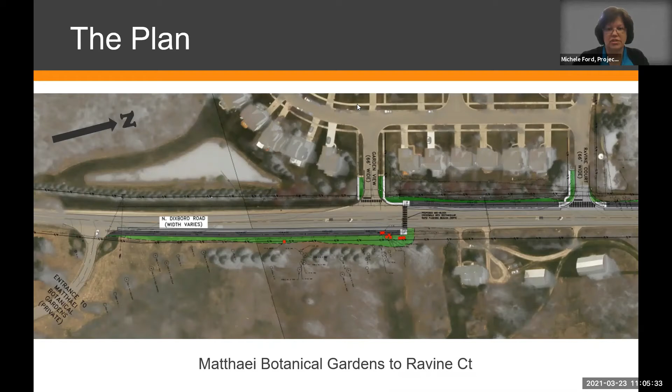There'll be a mid-block crossing there, and I have some pictures of examples of what that will look like coming up. Then it'll travel on the west side of the road going northward. You can see at Garden View and at Ravine Court that we're going to connect the existing sidewalks to the trail to make it easier for people coming out of the subdivision to get to the trail safely. Next slide.

Between Ravine Court and Amanda Drive, it goes along the west side of the road. It's going to be on the back of curb. I'll have some pictures so you can see what that's going to look like. There's also a culvert along there that we need to extend out a little bit, and I'll show you what I mean by that.

The green areas on this drawing show kind of the limits of disturbance. You can see that we're within the right-of-way through all of this. In some of the areas, especially as you get closer to Amanda Drive, it's pretty close to the current grade, so there's not going to be huge amounts of disturbance outside of the trail footprint.

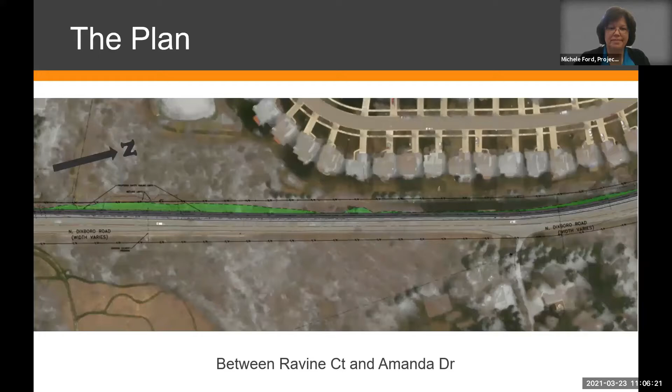Then we go across Amanda Drive. Once again, we're connecting those existing sidewalks into the trail. Then the trail will diverge a little bit from the curb to get it across Plymouth Road. That allows us to have room for some signal items. We have to have a controller cabinet for the signal.

It'll go across Plymouth Road. There'll be a signalized crosswalk with a countdown, kind of a traditional crosswalk box that you've seen. Then it's going to travel inside the Marshall Nature Area to go up to their existing parking lot up there. There's a little driveway. It's going to connect into that parking lot. So you can go to the next slide.

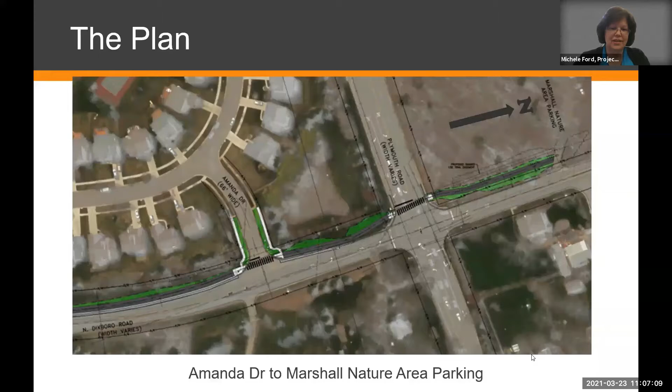In general, the typical cross section is going to be, we're going to construct a larger road shoulder. Right now, there's only a foot or two of paved shoulder out there. So we'll be adding a 4-foot shoulder, then some curb and gutter. And then the pathway will actually be about 10 feet wide of asphalt.

The 2-foot clear zone between the pavement and the curb will have some corrugations in it. I have a picture of those for you so you can see, and that will be a visual and a physical deterrent for people if they're getting a little bit too close to the curb. And then there'll be a clear zone between the end of the pathway and the rest of the grassy area. So go ahead, Emily.

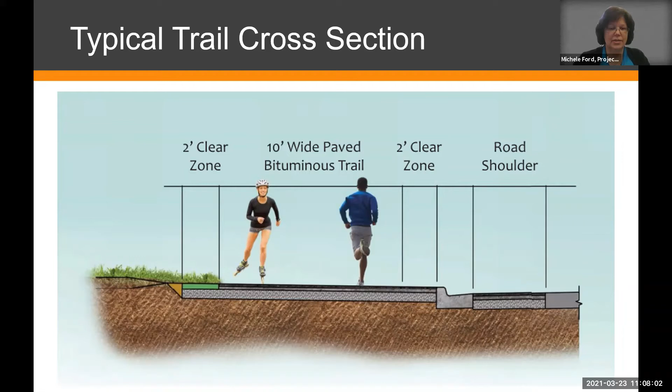I know some people like to see construction drawings. So this just kind of shows you that when we build the trail, we don't just throw asphalt down on the ground. We actually build a foundation for it. What this doesn't show is there's actually also going to be some storm sewer beneath it to help us with drainage so we don't have any water issues out there.

We put an aggregate base down. We typically like limestone so that it gives us a good foundation, and then there'll be a couple of layers of asphalt on top of that as well. So you can see here how we build it up to get a good foundation, and it'll be a good stable trail for us. Next slide.

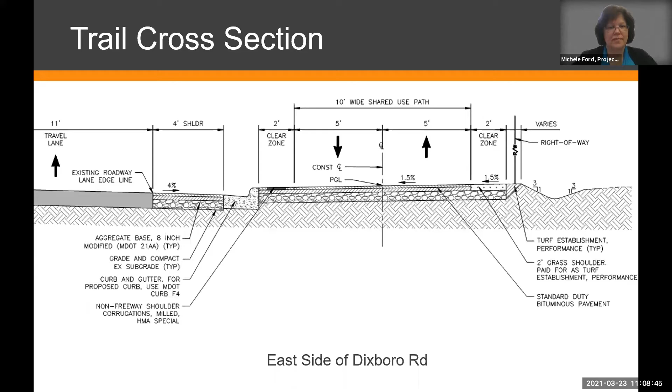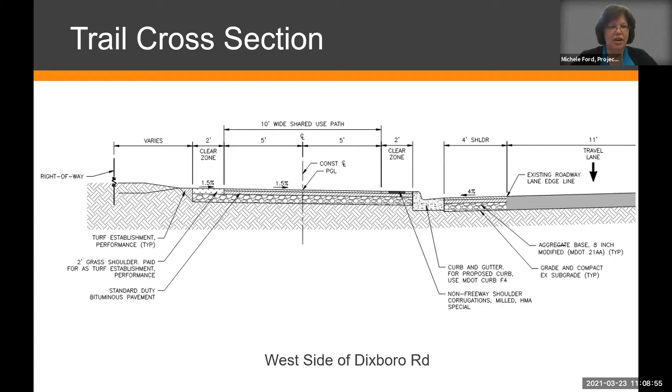This is the same thing on the west side of Dixboro Road. It's just basically a mirror image of the one that you just saw. Go to the next slide.

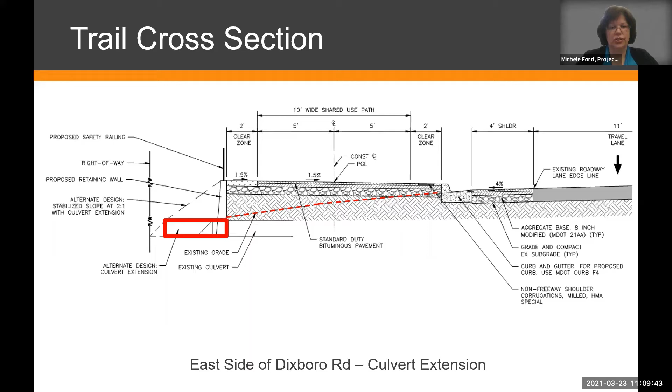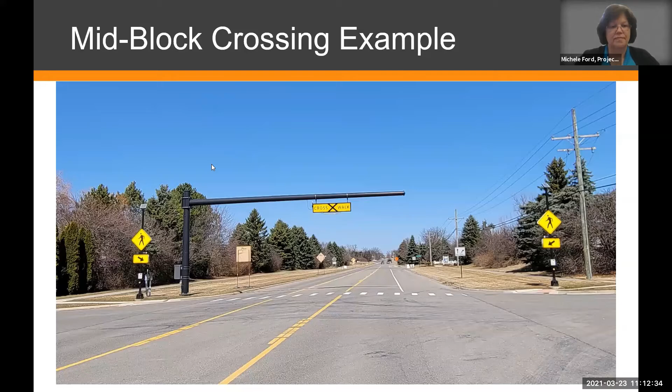In addition to the pathway project, we partnered this project with one of our Washtenaw County Road Commission projects, at the intersection of Dixboro Road and Plymouth Road. We're upgrading the existing signals, putting in all new mast arms, and also adding a right turn lane on southbound Dixboro Road to Plymouth Road. We received a grant, a CMAQ grant - Congestion Mitigation and Air Quality Grant. There's been a lot of traffic backing up there, so there can be an air quality concern. We get grants through special funding to help with projects like that. So we're putting in that right turn lane on southbound, which will be adjacent to our trail.

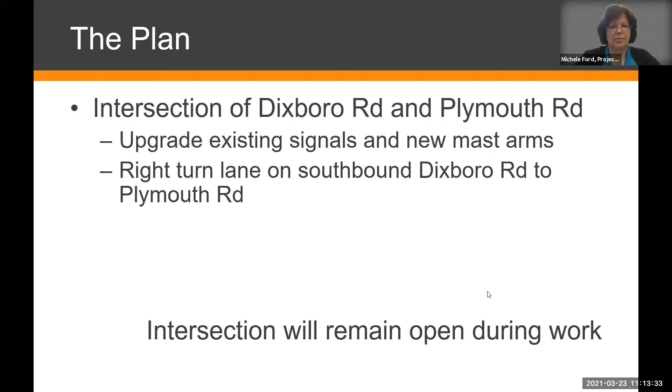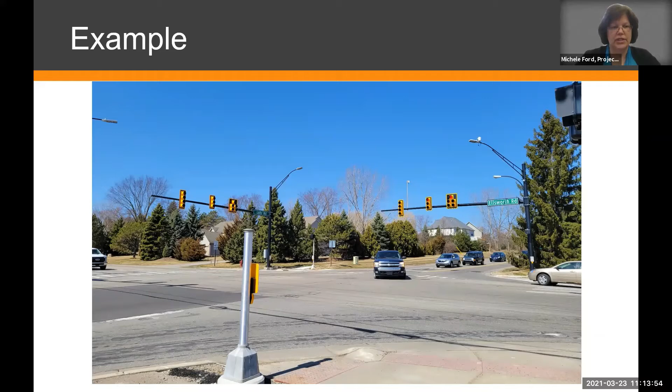This is a construction information meeting, so I wanted to give you some of the things you can plan on seeing during construction. We have a saying here at the Road Commission that it's going to get ugly before it gets pretty. There's a lot of work to be done, and the contractor will decide the order he does this, but in general this is the order we tend to see: clearing, then underground work, earthwork, the base course gravel, curb and gutter, asphalt paving, restoration, and signal work. We've got examples of each of those for you.

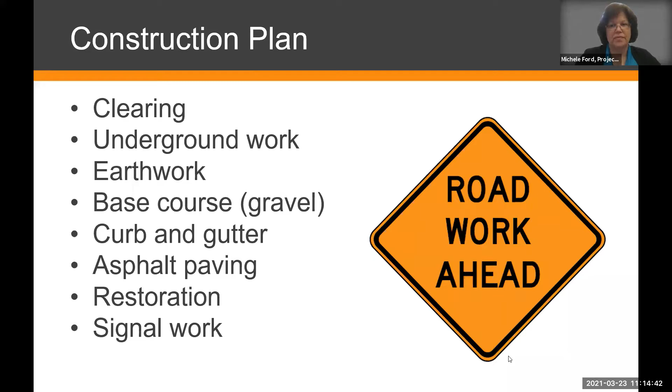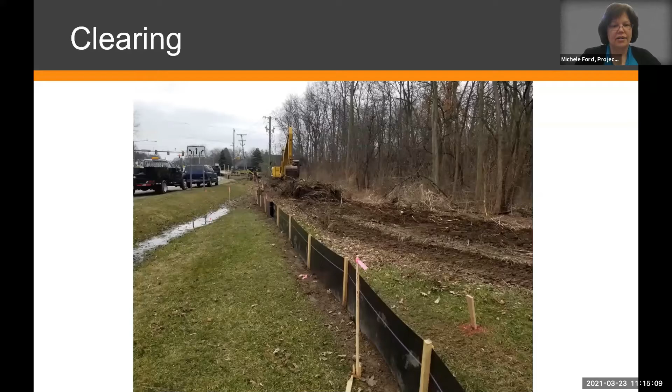The first thing you're going to see is some clearing work. This work is scheduled to begin on Monday, March 29th. They'll come in and there is some tree removal on this project, although not huge amounts. There'll also be some brush removal and clearing of some topsoil and items along the ground.

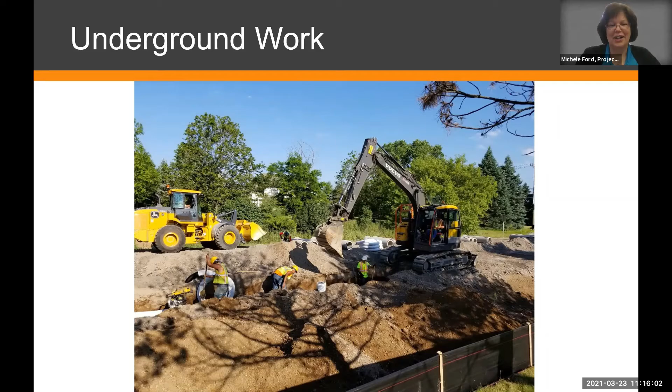The underground work is where we'll put in some of that storm sewer. I want to caution you that we dig big holes for this, so there's going to be a large, deep hole in the ground. Rest assured, we will fill it in and it won't be there when we're done, but it can be a little concerning as you're driving by - it could be a 5 to 10 foot deep hole where we're putting in storm sewer, allowing for water to collect and capacity for that, because we don't want any drainage issues once we're all said and done. It involves large equipment, lots of earthwork, and there will be a hole.

Once we get that storm sewer in, we're going to fill in the hole, and then we have to start putting in the amount of dirt that we're going to need to construct the trail. We have to get it to the level that we need it.

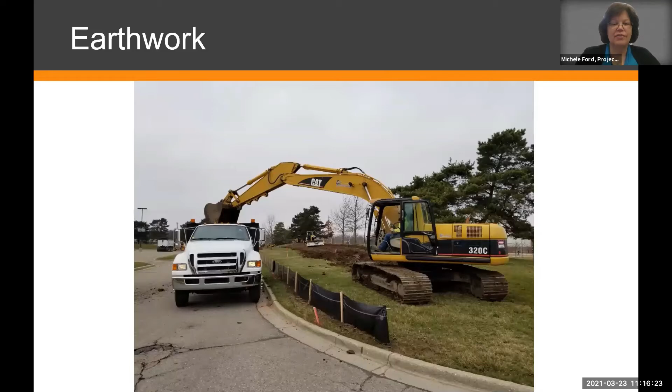The next slide will show that this is what we call grading. This gets it to the approximate level that we need it to be. In some areas, you're going to dig a little deeper. In some areas, you're going to fill.

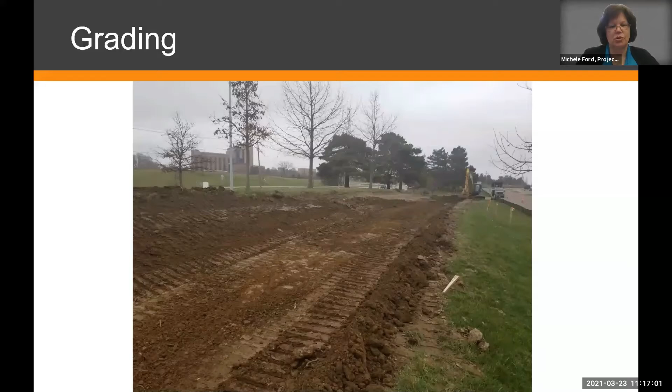This project in general stays pretty close to the existing grade because we're right there near the side of the road, but there still is going to be a little adjustment here or there to make sure that the water is flowing in the direction that we want it to. We don't want it impacting any private properties or anything like that. We need to collect it and handle it, and we'll make sure that it's going in the right direction.

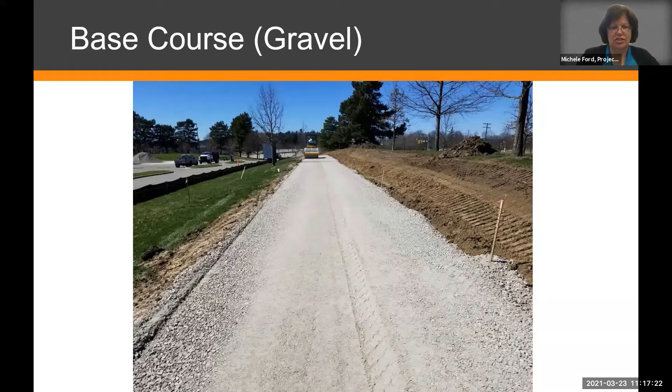So next, we put down that base course, which for us is going to be limestone. It's crushed up, they place it there and they roll it to compact it. They test it to make sure it's at a certain compaction so that we don't have any settlement issues afterwards.

Then we're going to probably put curb and gutter on. In different areas these things may vary a little bit in the order, but usually we put the curb and gutter on after we've got that aggregate down.

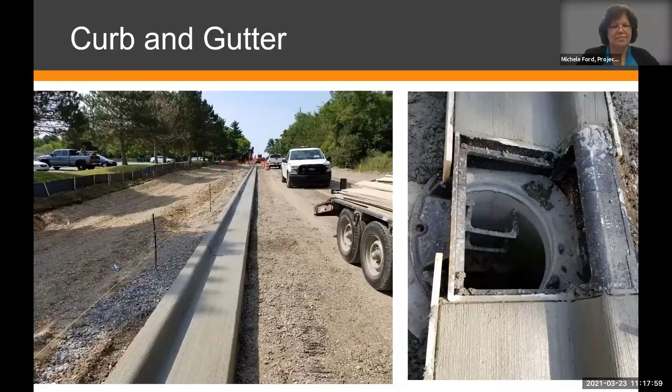And then the pavers will come in. There's a couple different layers of asphalt paving. We put down, I believe it's going to be 2 inches of one mix, and then we add another 2 inches on top of that. That gets all rolled out, compacted, tested, to make sure that it's all stable and constructed the way we need it to be.

The contractor is required to restore all areas that have been disturbed by the construction. So rest assured that when we dig those big holes and when we're doing that earth disturbance, that we will restore the area when it's completed.

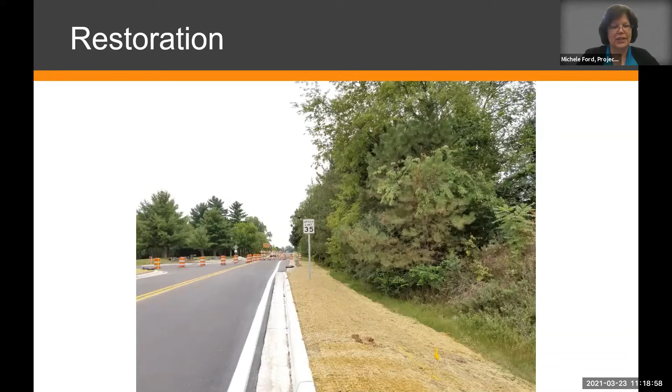So in order for this to work, of course, Plymouth Road, Dixboro Road is a pretty busy intersection. We can't take one set of mast arms down and wait a couple of months before we put the next set of mast arms up. So you may see out there both mast arms at the same time.

We have to put the new ones up, get everything complete, and then when we're ready to switch it over, we will pull that old one down. But there will be an overlap time slightly so that the traffic intersection is never without a signal. We don't know the exact timing of when this is going to happen, but we will keep you informed as we go along.

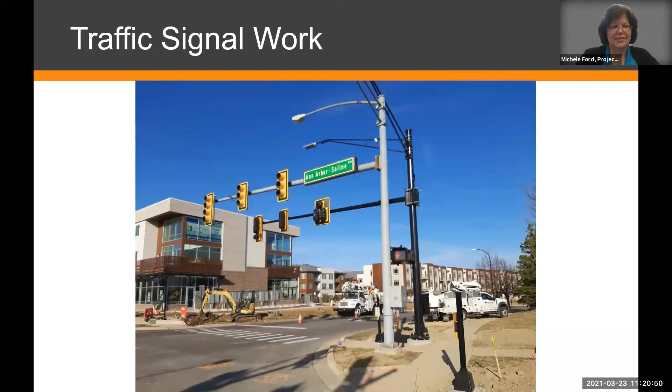This is concerning to the Department of Environment, Great Lakes and Energy. So they asked us, as part of this project, and we needed it for our permit, to come in and do some work around this culvert. We're going to put riprap around it, some stone, and grout it in to stabilize the area underneath so it doesn't deteriorate anymore. This shows that sometimes in order to get permits for one part of a project, we have to do something else to qualify. We're not touching this culvert on this side of the road, but because we're touching the other side, EGLE decided we had to do work on this one in order to receive the permit for the other side.

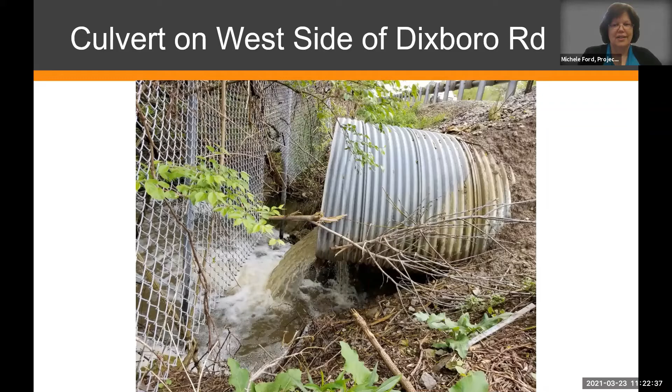As far as the schedule goes, our clearing and tree removals are supposed to begin Monday, March 29th, per our current schedule with the contractor. The culvert work - the riprap underneath the one I just showed, and the extension - is also part of our EGLE permit, and there's a time of year restriction on that, so we have to wait until after June 30th. We'll be working on other parts of the trail, but for that small section in the water, we have to wait until after June 30th. The rest of the work, our schedule shows we'll be complete by later this fall. The contractor will decide the exact schedule of the rest of the work.

Those new traffic signals, the mast arms - the big tall black arm the signal itself goes on - have to be ordered and take a long time to arrive, 4 to 5 months before we can get those delivered and put up. So that will probably be one of the later parts of the project. They'll likely build the trail portion before getting to the signals, probably in late summer. But once again, we'll be starting this coming Monday, finishing by late fall, and the rest is up to the contractor. Next slide.

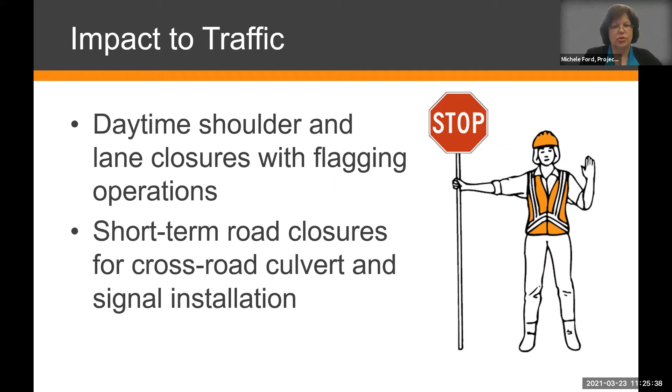In general, mail delivery should not be impacted, and neither should trash pickup. In the subdivisions, we will not be blocking access. It's possible that as we're doing construction on one entrance, you may have to use the other entrance for a day or so, but in general you will have full access to your homes.

A family had come and they just decided that they thought the trail was cool and they wanted to look and see the big equipment at work. It's not safe for pedestrians and bicyclists. So we ask that you obey any traffic control that we have out there, including pedestrian barricades or any other barricade device, and stay outside of the work zone. Any disturbed areas will be restored before the end of the project.

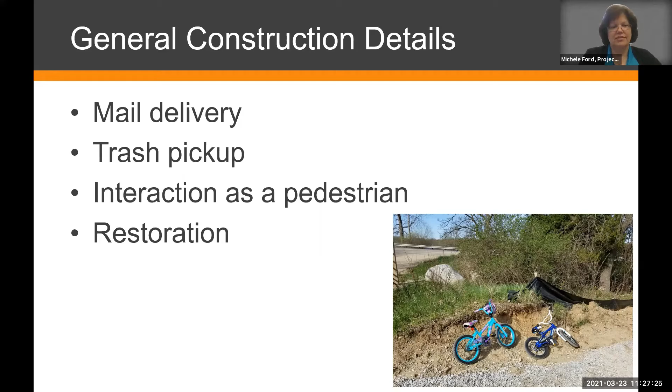Thank you, Michele. Just a few additional notes. Michele did a great job covering so many aspects of this work and providing a great summary of the different parts of this project. But just some things I'd like to note and stress to everyone here at the meeting, as she said, it's so important.

It's used so often that it's become a cliche, but safety is job one. We need to ensure that we promote the safety of those within the work zone, the construction operators, the laborers, the flaggers, but also the motorists and those that might be interested in seeing the construction activities. Michele used the word enticing. It's very enticing for some people to want to view the construction operations.

I feel fortunate with the work I've done for 20 plus years that I've had the opportunity to see some really interesting and incredible construction operations. But everyone needs to be very thoughtful about that. The work zone is inherently a hazardous place. There's large equipment, many of those pieces have large blind spots, and the operators are quite skilled at what they do, but everyone needs to be mindful of not entering that work zone, that construction influence area.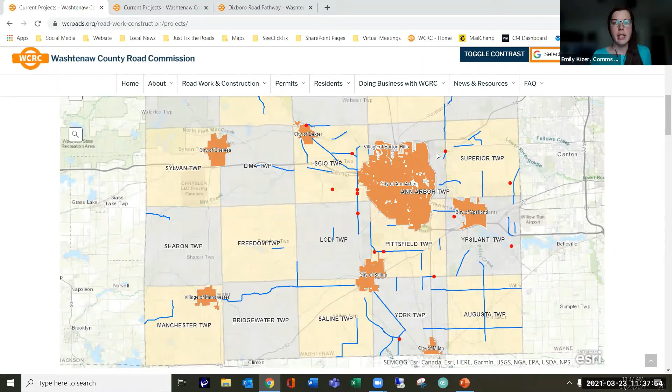On this current projects page, we have a map of all of the different major projects we have going on throughout the county this construction season. It's going to be a busy one. You can find the Dixboro Road project here, and then click this more info link for the project page itself. We also have a listing of all the project pages, if you prefer a tile view versus a map. We like maps here at the Road Commission.

And so here is the pathway website, with general information about the project. We will update this as we get closer and know more about the actual pathway construction.

We've got some general dates here, and then this is where we will put project updates. Throughout construction, every couple of weeks depending on what's going on, we will provide a summary. We like to do pictures when we can because this is some cool stuff going on, but we just like to show that versus having people go to the construction site to see it. So we'll provide information throughout on these updates.

You've also got Michelle's contact information here. Under this helpful links part, we've already got slides from our 2019 design meeting, our public meeting. This is where I'll post a link to the recording from today's meeting and the slides from today's meeting. And then down here, you can click to subscribe to project updates.

You can enter your email address in here. Shameless plug, we also do a lot of road advisories for general road work going on, not necessarily connected to a project. If you want to receive those types of advisories for your township, you can subscribe to receive any township type alerts here, and we also have some other emails that we offer. You'll just want to make sure that you select the Dixboro Road pathway when you're trying to subscribe.

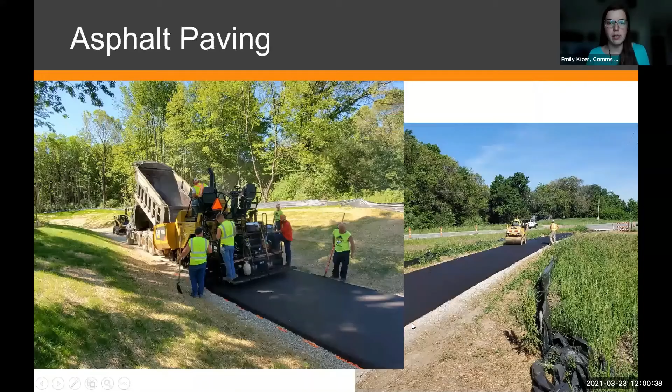Okay, I think we've gotten through all of our main questions. I know, Wei, we said we will follow up with you and provide more conversation about the concerns you brought up. It looks like, Karen, if you want to ask a question, you can ask in chat or virtually raise your hand. And I think we had asked, who was it, Jay Miller, if you wanted more information about those specific trees, just provide us an email, or you can reach out. I'll go back to Michelle's contact information. If you want to reach out to Michelle directly, she can provide more information on those trees. So let me get back to that.

Okay, Karen, if you've got more questions — she says she has a question in chat, but didn't say what it was. Let's give her a minute here. Oh, looks like she wants to raise her hand. Okay, Karen, you should be able to unmute yourself. Go ahead. I just can't type fast enough to get my question in.

No problem, go ahead. So my home bumps right up to this project just south of Amanda Drive, and we don't have the vegetation, we have the berm. We have some trees, but they don't really block the privacy. So I was interested to hear there's not going to be any added privacy vegetation, because that's going to be a big difference behind our house. And then the berm, is it going to be coming up at all in the width near our home? Because I'm closer to Plymouth Road, and that's a pretty big dip down there.

If you provide your exact address, you're welcome to email me or provide it another way, and I can show you a cross section of that particular area. But like I said, in general, we're fairly close to the current grade, though there'll be a little fill and a little cut in different areas. So if you can pinpoint it for me, I can send you a cross section of that area so you can see how close it is to what it currently is.